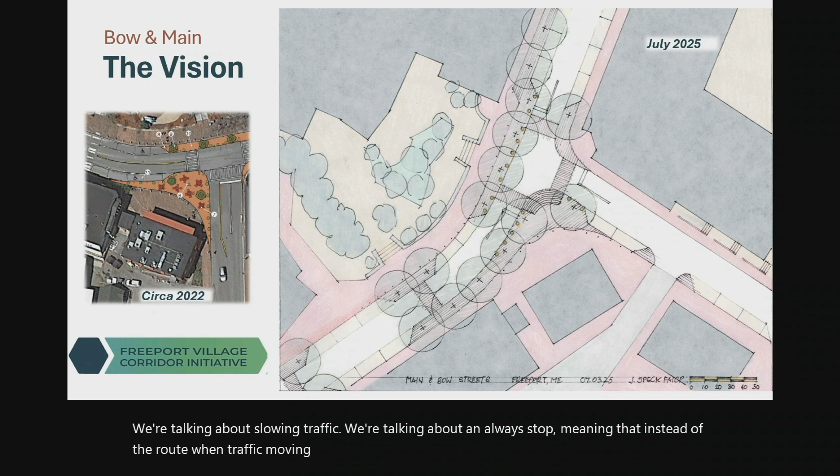The vision, here it is. That's the long-term goal there from a sketch from Jeff Speck. So what we're talking about here is narrowing the intersection. We're talking about slowing traffic. We're talking about an all-way stop, meaning that instead of the Route 1 traffic moving through, there would be stop signs there on Bow and both sides of Main Street there, both sides of Route 1.

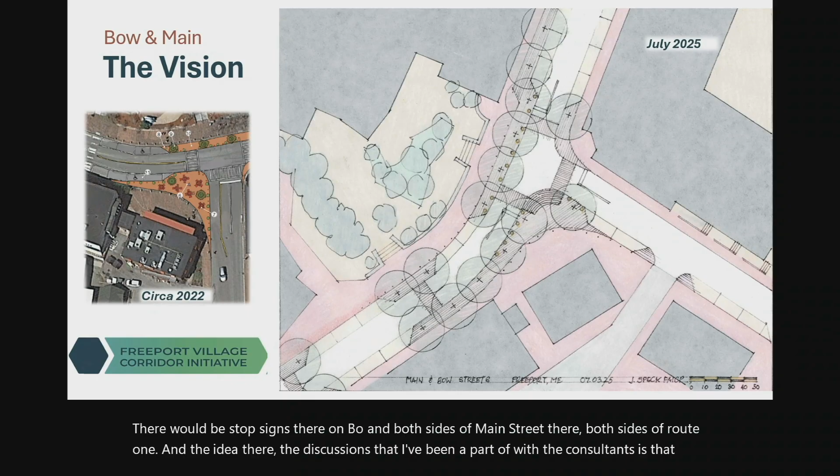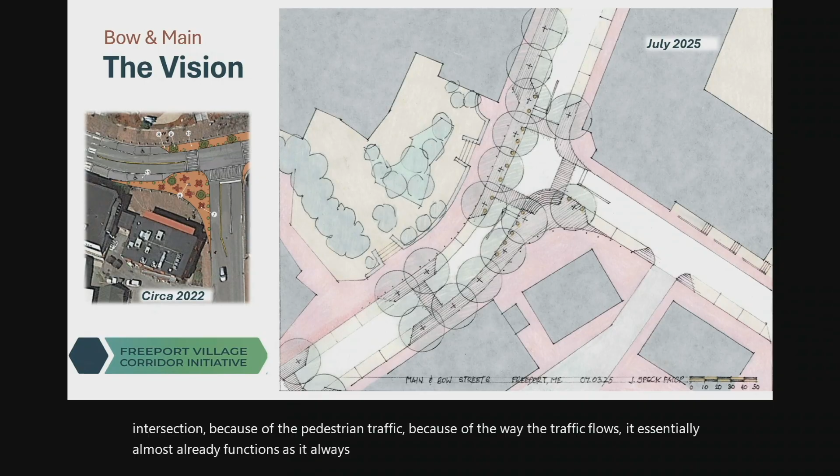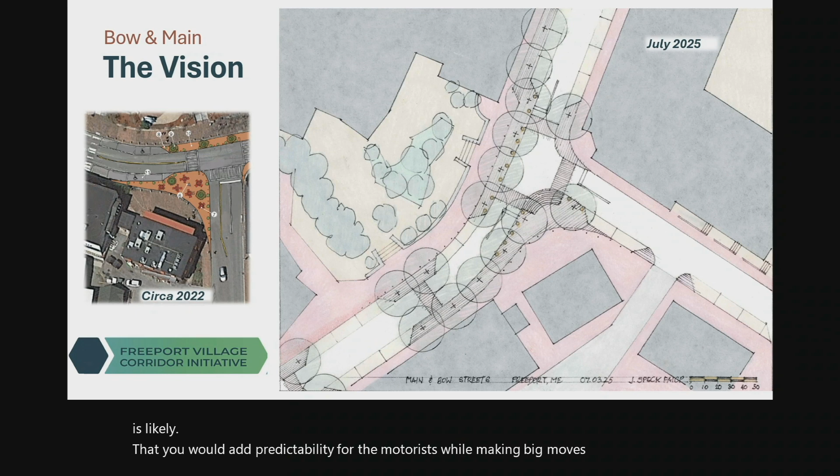And the idea there, the discussions that I've been a part of with the consultants, is that this intersection, because of the pedestrian traffic, because of the way the traffic flows, it essentially almost already functions as an all-way stop. And testing this out and trialing it, the outcome is likely that you would add predictability for the motorists while making big moves to enhance pedestrian safety by shortening those crosswalks. So that's the vision, that's the idea.

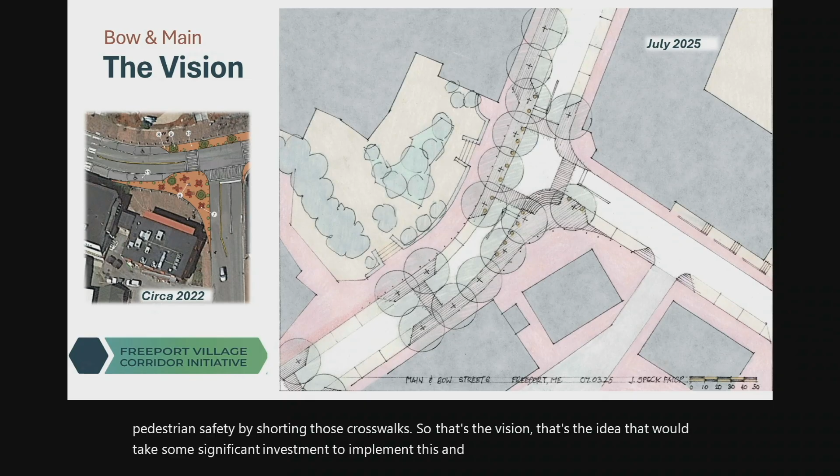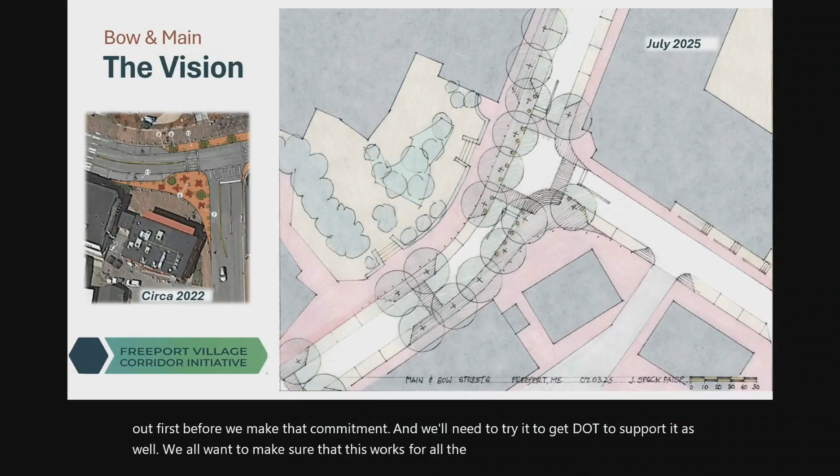That would take some significant investment to implement this. And so the idea here is to try it. Let's try it out first before we make that commitment. And we'll need to try it to get DOT to support it as well. We all want to make sure that this works for all the stakeholders who would be impacted or who would benefit from it. So, let's see, what am I freezing up here?

This is the high-level draft concept that Stantec put together, shared with the internal staff team, and then shared with the Complete Streets Committee last Tuesday.

The idea is to convert the intersection to an all-way stop, to eliminate the turning lanes, to reclaim that public space for amenities. By eliminating the turning lanes, you're shortening the crosswalks. Stantec, through their analysis, believes this is feasible and wouldn't have a major impact on traffic compared to how folks move through the intersection today. And it creates a fair amount of public space as well.

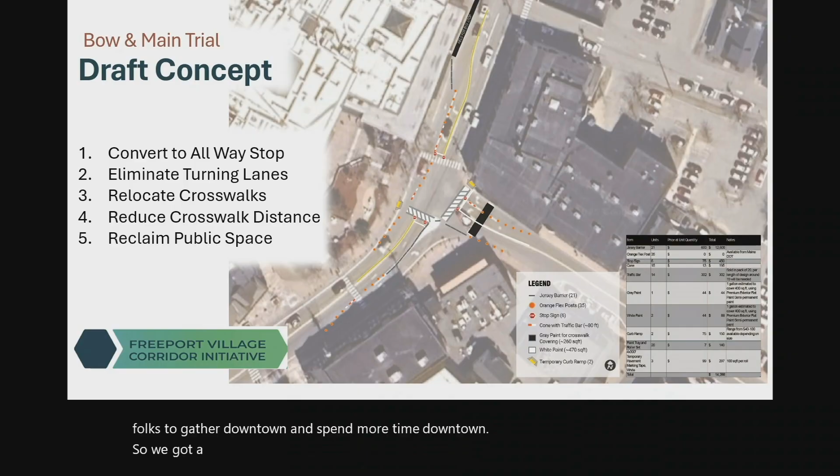Susanna from Meeting House Arts and other folks have ideas about how to activate that public space and add amenities, really turning it into a community spot that everybody's proud of and that encourages folks to gather downtown and spend more time downtown. So we've got a lot of folks thinking about this and how to help implement it, and we're here to discuss that with you tonight.

If you were to endorse this idea tonight, there is subsequent work that has to happen. We're in the engineering and design phase. We would want to continue stakeholder outreach, talk to the abutters, make sure everybody understands what this trial would mean and what it doesn't mean. It doesn't mean it's going to happen permanently. It's not going to stay there forever. We want to learn from it.

So gather that input. We need Maine DOT approval. Council endorsement tonight gives us the runway to continue to push forward on this and to work towards DOT approval. Following that, communication to the community.

Residents who may or may not be paying attention to the Complete Streets Committee or this town council meeting—what we'd want to avoid is them encountering this as a surprise without any understanding of why we're doing it, why we're exploring it, why we're trialing it, what it means and what it doesn't mean. Pete Yazikevich, our communications director, has already put some thought into what that campaign would look like, how to reach folks where they're at, and how to help them understand why we're doing it and what we're trying to accomplish.

Installation—we'll talk in a minute about a budget and what the commitment would be from Public Works, but we'll have to go ahead and install this. That will take some time. There is existing paint on the street today that would have to be adjusted to clarify expectations for motorists and pedestrians. A fair amount of work would have to go into that.

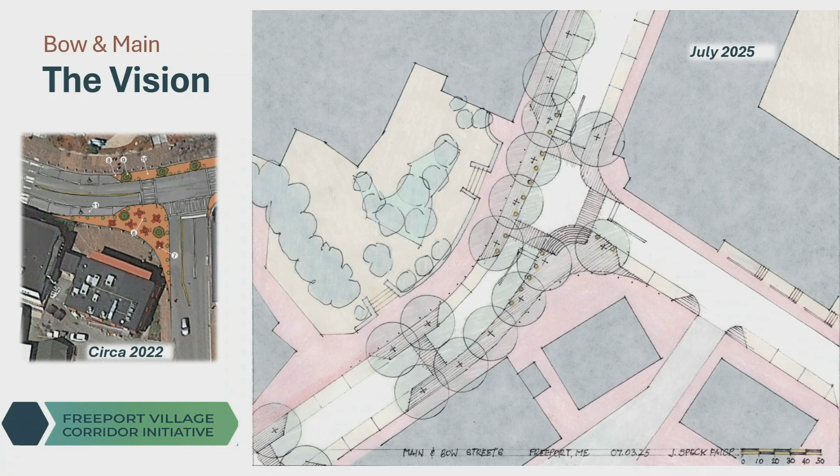But I completely understand - that's why I kind of soft-walked fall versus summer. I don't want to be the guy that's tapping the brakes, that's not what I'm here for. Either way, I'm very excited about it. Yeah, no, I understand. I love what's happening, I get it.

One question I have as well is, the PPI is not an unlimited resource, right? It's finite. Does doing this take away from anything else in the project with them? No, I think we're good. There may be minor modifications, but I don't anticipate anything major that's not reasonable.

That's right, yeah. Cool, sooner is better.

It is a trial, and I think if we do it in May, we're in for the whole summer - very hard to take away. If we do it in the fall, we have peaks, but it's not a constant flow of traffic. So we might be able to tweak it or learn something from that before we put the full-blown version together again in the spring. So I'd be for doing it in the fall. I know it's a little more work, but it'll give us time to think about what we want to do in the spring, instead of waiting until spring and saying, oh wait, we should have done this, we should have done that.